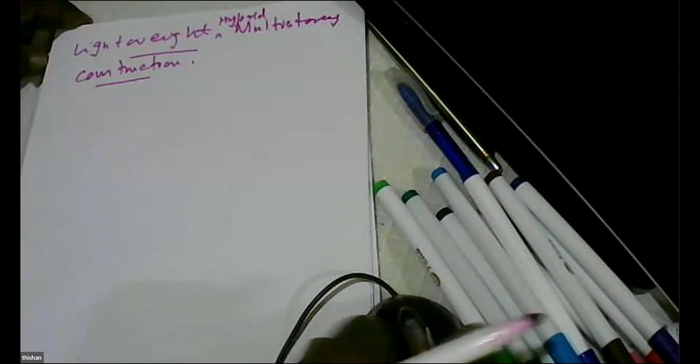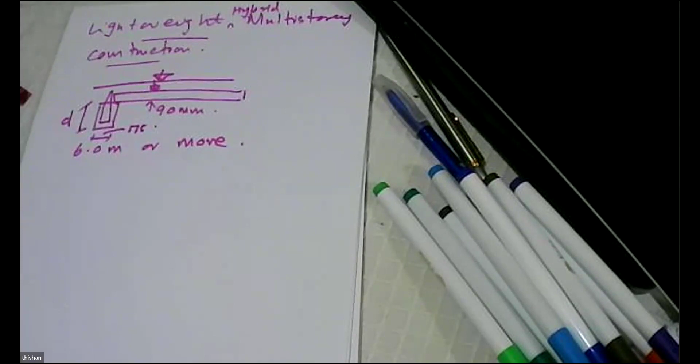Now, when we talk about lightweight hybrid multi-story construction. So last time I showed you that this precast slab system, with a thickness of 90 millimeters altogether with the screed, has the potential to span anything up to 6 meters or more, despite its slab thickness being 90, by using 175 millimeter wide beams, where the depth has to be increased as the span increases. So that's what we learned last time.

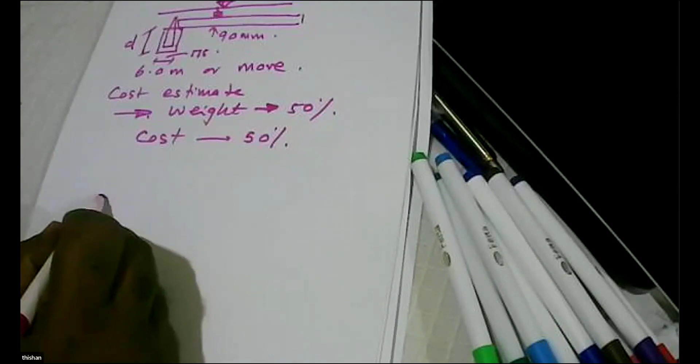Then we did a rough cost estimate. And what I showed was the weight is nearly 50%. Cost is sometimes even less than 50%. So it could be 50% or less. Then, we are having this system where we precast the beams. It can be precast or cast in situ, depending on the lifting capacities available. If you have a tower crane, you can even precast these beams.

Then, because we are doing a 45 millimeter thick screed, where all these beams are propped, there are props during the construction. So the deflection is 0. So when you are removing the props, first we have to remove these. Then gradually we have to remove these from the center outwards. If we are removing the props outer to inwards, and finally we remove the middle prop, then we immediately increase the span by 100%.

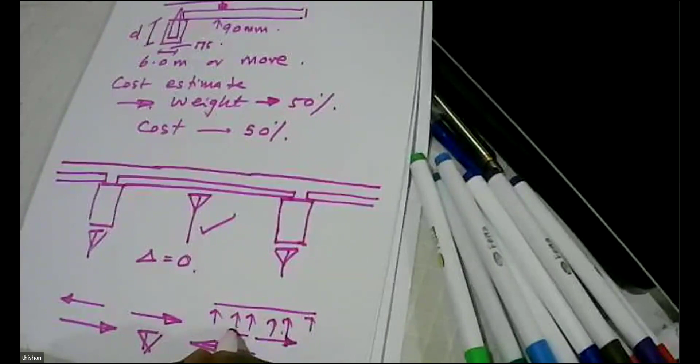So basically we have many props. When we are removing the props, it should be center outwards. But if we start removing the props this way, it's wrong. Why? Because we are going to remove the prop in the middle at once, and that can increase the span by 2 times, adding a shock moment onto the system. So this is the correct way of removing the props. But the center prop can be removed because the slab is not subjected to a heavy load.

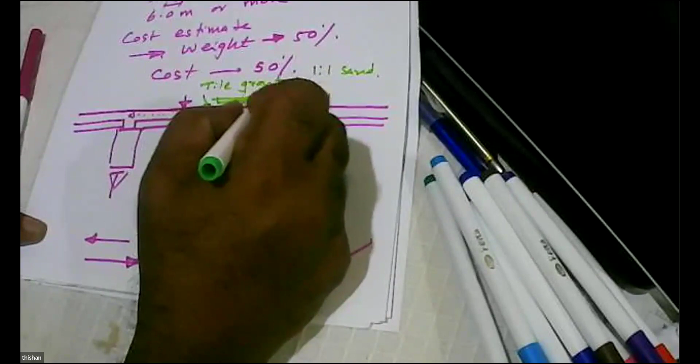Then the other important thing is, because we are having this only as 45 millimeters, the other advantage is that we can do it at a controlled pace so that we can finish it perfectly level. Either the tile bed can directly come on this, and another technique available is tile grout. We add 1:1 sand as well. So rather than using grout directly, we can use a sand and grout mix, and that will allow us to maintain a slightly thicker tile bed, so that any unevenness on this surface can be taken into account by the tile bed. So you don't need a leveling screed, if we are careful.

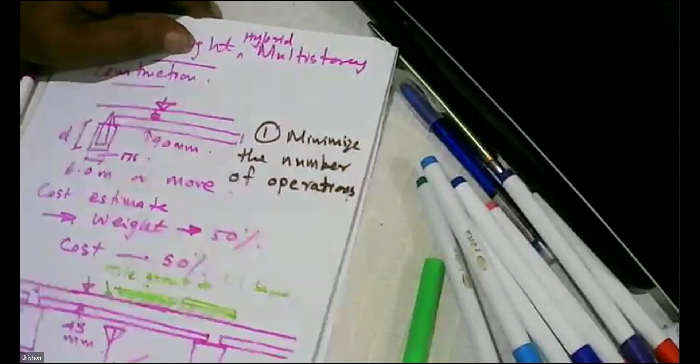So if you look at today's context, we need these because we are supposed to minimize the number of operations. Although we say labor is cheap in Sri Lanka, still, we have to spend 3,500 rupees per day for a laborer, and 4,500 to 5,000 rupees per day for a skilled laborer. So minimizing the number of operations is also an important part of this cost optimization process.

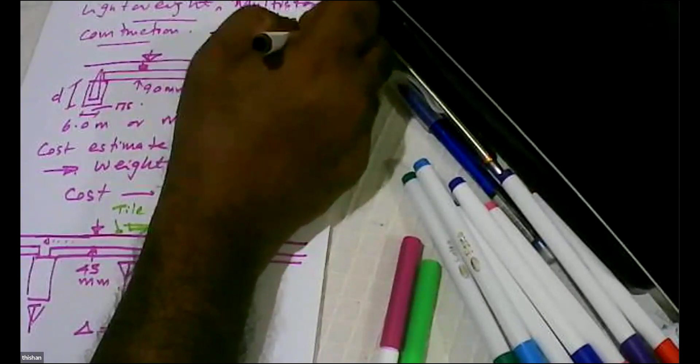So today is the 15th lecture of this series, and today is 20th March 2024, and page number 1. Okay. So basically what you see is this.

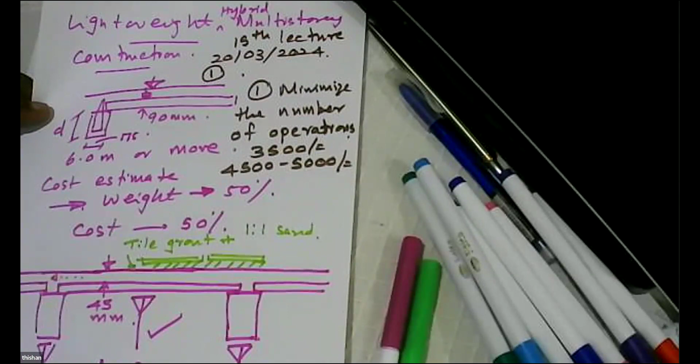Then we have to see what are the possibilities available when we try to apply this technology to apartment buildings and houses, and what are the remaining parts of design that we have to do. So far we have covered most of the concrete related designs, like the design of the slab system, the composite system, and individual beams, in great detail. Now, because it's a hybrid system, the concrete block wall or cement block wall is also playing a role. So we have to look at masonry design and also the column design.

So the number 2. So if I look at a typical scenario, let's say we have a house like this. So we have the rooms, this area, like wet kitchen, pantry, and bedroom, and washroom, whatever. It can be anything that we like.

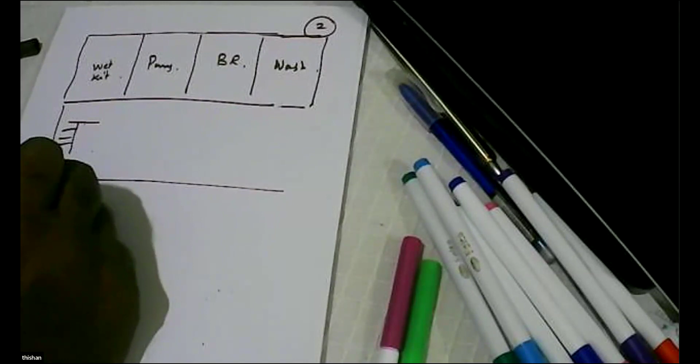And then we might have, so I'm trying to use the same plan that I used earlier to highlight the issues. And then this might be the living area. And you might have a garage and entrance and bedrooms, washrooms, and so on. So what are the issues? So if you look at this type of system, then how can we optimize?

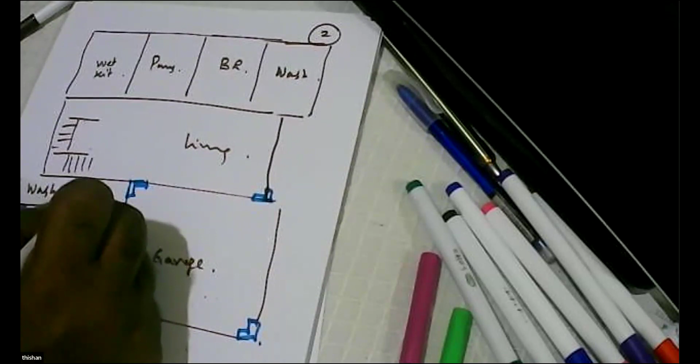So here, these are living areas, so we might have large openings. So we might need some columns like this, and some columns like this, and we might also consider having some columns at these locations. I'm just marking, but some of these may not be essential. So if they are not essential, we can drop them later. So these are possibilities only. And these locations, few columns.

So why do we need columns like that? For example, we need large openings, windows. We might need large doors here. And we might need large windows here. And we might need another large opening connecting the living and garage spaces. And here we might need a big window. So when you consider all these possibilities, what is the best way to arrange the beams and how to optimize?

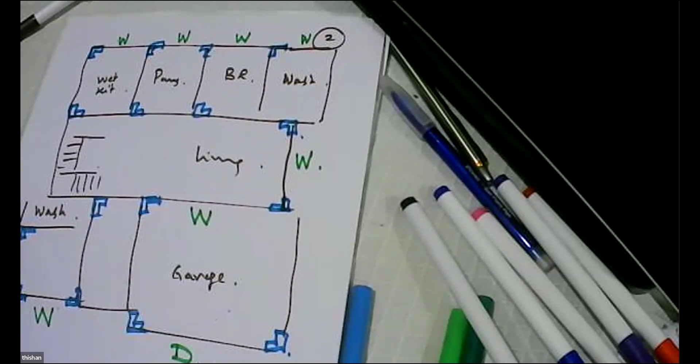So because we are having some columns here, we can certainly run a main beam here. So I'll use purple for the main beams. So we can run a main beam here. And we can also run a main beam in this area. Run a main beam here. Run a main beam. Then we have to see in which direction we run the secondary beams, the beams that will support the slab panels.

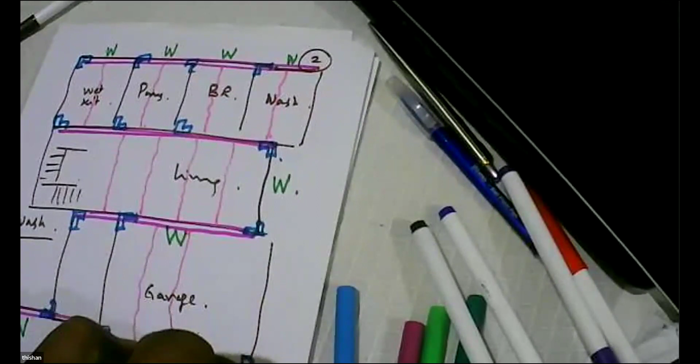So if you look at that aspect, what you see is we can run a set of beams like this. And we can run a set of beams like this. And we can also run some beams like this. If this area is about 2 meters, you can directly support onto the beam. And here also we can run the beam like that. So those are the possibilities, which means we are running the slabs this way. Here also we run the slabs this way.

So if you look at the scenario, here you can see these slabs will span this way. So this is 4 meters, so half of that is 2 meters. So we have a beam. So this wall will carry a load, and the load has a width of 2.0 meters. And this beam will carry a load.

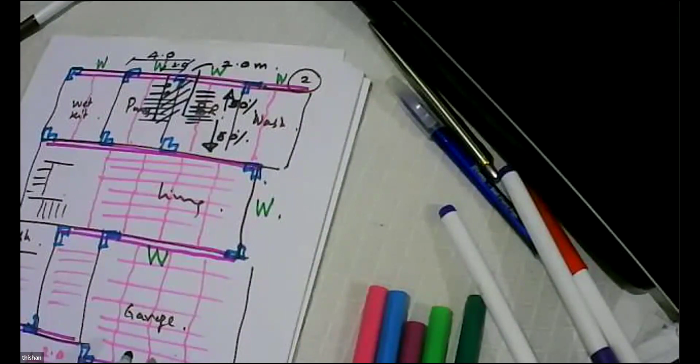50% of this will be transferred this way. 50% will go that way. But that 50% will go on to another concrete beam, and there are concrete columns to take that load. So the concern may be the load that is transferred onto the masonry wall. So we have a masonry wall. The thickness can vary between 150 to 200. Minimum is 150, and generally the maximum width of a block wall is 200. So we have an upper limit of 200.

There's a load. So there's a panel supported on the wall directly. Then on that, we are going to build another wall like that. And then we might have another slab. So if you consider the load from the slabs, the slab thickness is 90 millimeters. So we have 1.35 times (0.09 × 25 + 1.0 for finishes) plus 1.5 times the live load. The minimum load specified in Eurocode is 1.5 for houses, anywhere in the house. But we'll assume something like 2 just to keep a small margin.

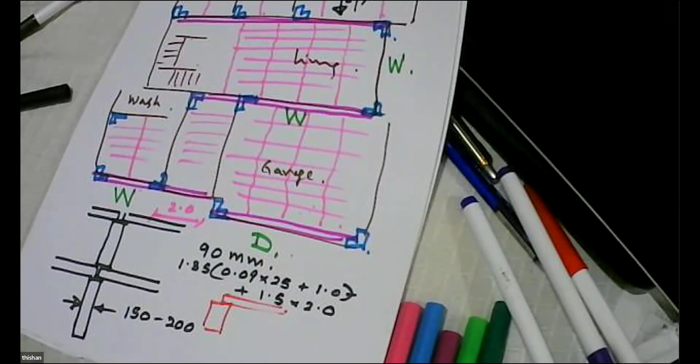So this comes to 0.09 × 25 plus 1, 3.25 × 1.35, plus 3. So 7.38. So let's say approximately equal to 7.5 kilonewtons per meter square. That is the load that will be transferred here. So you can see, at each floor level, we get 15 kilonewtons per meter transferred onto the wall.

So the question is, how many floors can this 150 millimeter thick wall support before it reaches its capacity? That is a question we have to ask. For that, we have to look at masonry design.

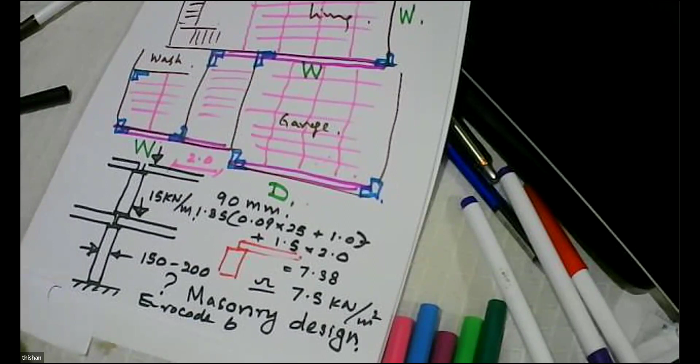So now when you look at the situation, page number 3, we have to see where these columns will come. So we have a wall, and the wall goes like that. When we have a wall like this, we can have two possibilities. The first possibility is we can have a typical 225 by 225 column.

This is 150 millimeters, and we try to have this column. But there are many disadvantages. One is we can see it creates a corner, and plastering this corner is a difficult task. It takes time, it takes labor. It won't take any extra material, but it takes labor. And people find it unacceptable to have columns projecting like that.

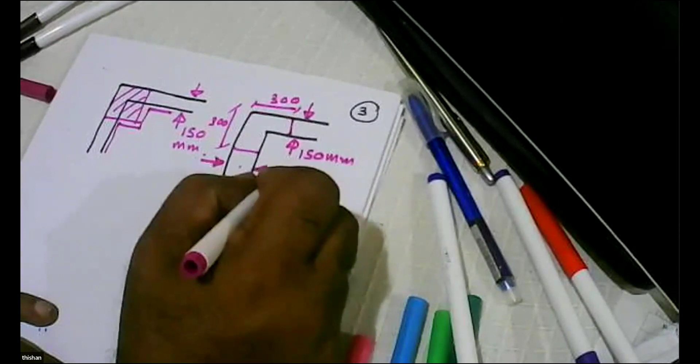So what is the other option available? Other option is have 300 this way, 300 this way, and have a thickness of 150. So it's an L-shaped column.

Now let's do a comparison. So this is 225 by 225, the area is 225 by 225. Here the area is 300 by 150 plus 150 by 150. So let's do the numbers and see which one is bigger.

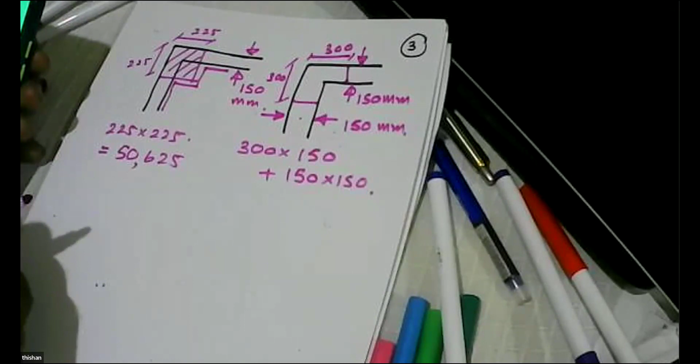If you look at the smaller one... Bandhuka, can you tell the answer here? 225 by 225, so 50,625, is that right? The other one is 300 by 150... other one is 67,500. Okay, so we have two areas.

So you can see this column is even bigger. Although it looks small, it's bigger.

So if you look at the type of loads that come onto this column, the loads will primarily come from this side. It goes like this until it meets another column. So these are the main beam. Every 2 meters it will have a beam running in the other direction. So you can see these 2 meters, these 2 meters. All this load from here to here will be transferred onto this beam.

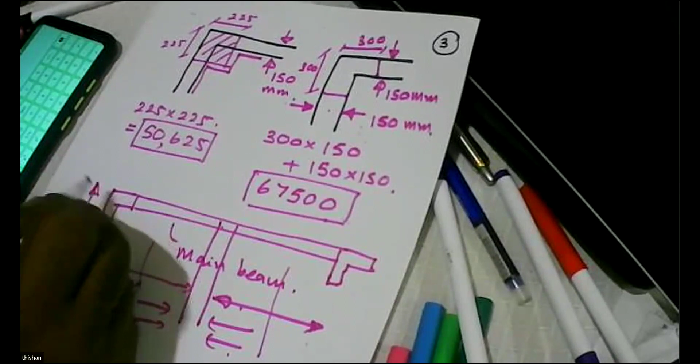And in this direction, if we have 4 meters, say 5 meters, then the load on this beam will be like this. It will have the load.

Let's assume this is a large window, and similar windows are in the upper floors as well, so we can simplify the calculation. So what we get is a load of 7.5 into 2 meters into 5 divided by 2. So we get a load of 7.5 into 2 into 2.5. So we get a load of 37.5.

And it's a continuous beam, so we can analyze it. You can see it's not a major load.

Then we have to see at which level we can have this beam, because if we have a window, we need to have a lintel as well. If you look at the level that we need this beam, you'll see we have the building opening - generally the openings are 2.4 meters tall, and each block has a height of 200. So the main beam can have a height of 2 times the block work, so the beam can have a height of 400. And then at the center we are getting 37 point...

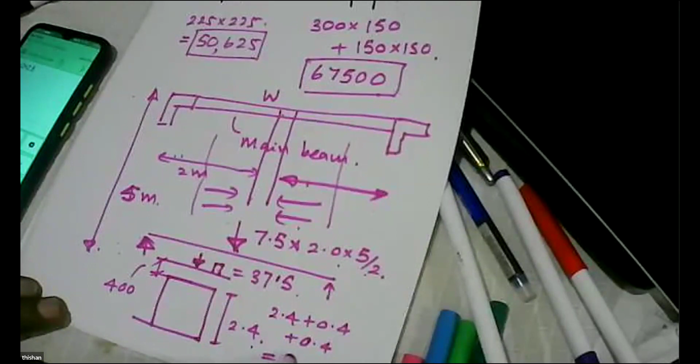And then we have to decide whether we are going to have the beams in this other direction, like this beam, at which level. So that's something we have to work out. If it is 2.4, 2.8, so you find that 2.4 plus 0.4 plus if the height of the beam system is, let's say, another 0.4, you'll find the floor-to-floor height is 3.2 meters, not excessive. The floor-to-floor height is 3.2 meters. So these numbers have to be carefully worked out.

So you have to decide at which level this beam will run, and the ideal is we run it at the lintel level, so that automatically this beam will form the lintel. So you don't have to spend money for lintel or anything - the main beam will be the lintel as well. So there's an advantage there as well.

So if you look at this scenario, we get a load of 37.5. Half the load will go this way, half will go this way. So you can see from each floor what you are transferring, and when you consider the self weight of all these beams, it might be about 20 kilonewtons. So we are not transferring a huge load, it's a small load when the rooms are small.

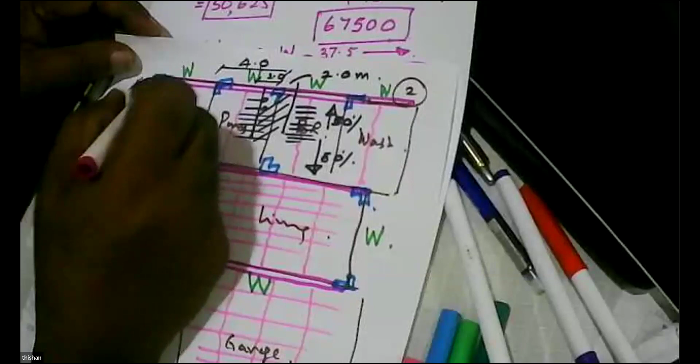I'm looking at this part of the building where this can be about 5 meters and these are around 4 meters. Because we are transferring part of the load into this side by having slabs, and also having windows one on top of the other, the loads on this beam will not be excessive. So this column is very lightly loaded.

So what I want to tell you is, we have a column that is very lightly loaded, but it has an area bigger than this column. Which means this is good news, because we have a column supporting a main beam but it is not excessively loaded. So this says we can have minimum reinforcement on this column. That's good news, because we want to minimize the amount of reinforcement needed in the building.

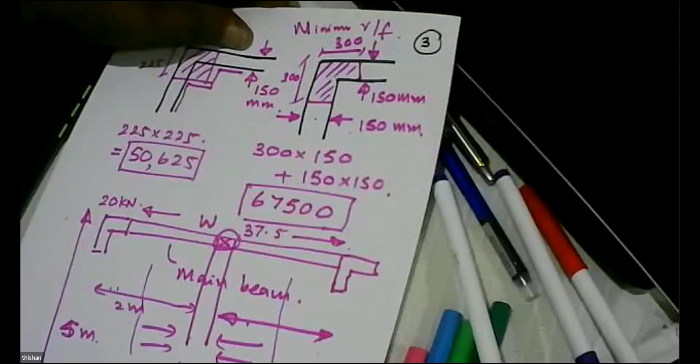So what is the reason for this? The reason is part of this load is actually taken by the wall. That is the reason. So you can see, not only with the slab, even with the frame involved, we are going to get an advantage where we need a minimum amount of reinforcement.

So if you look at this scenario, let's look at the column. I'm showing you the possibilities. When you do the actual calculations we can get the exact numbers. So this has 300, this has 300, this has 150, this has 150.

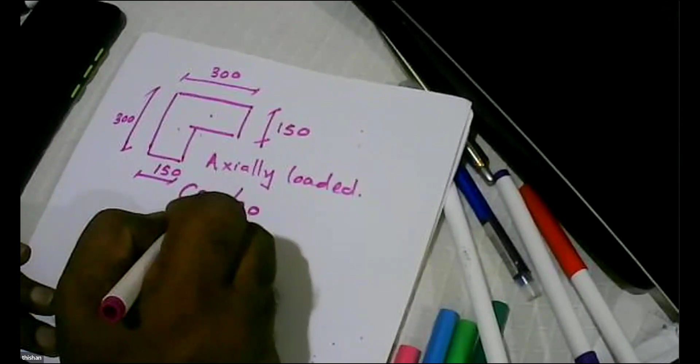Let's assume that this is axially loaded, without reinforcement, and let's assume we have been smart and able to get a concrete of C25/30 by using some admixtures and also with proper curing. So if we get 25 megapascal concrete, what is the load carrying capacity of this section?

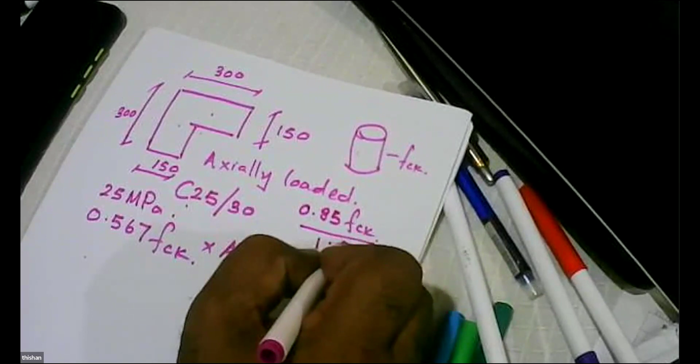Load carrying capacity is 0.567 FCK times area of concrete. How do you get it? Because when you test a cylinder, strength is FCK, so the axial load carrying capacity is 0.85 times FCK, and we have to divide it by the partial factor of safety for material strength 1.5. So 0.85 divided by 1.5 is 0.567. We can substitute 25 here, and the area 67,500 here, and divide, with 10 to the power minus 3.

You will see that this can carry 0.567 into 25 into 67,500, which gives 956 kilonewton capacity. So you can see this column, although it looks small, it is not small. It is bigger than the typical or most familiar size of columns. It is bigger than a 225 by 225 column, and it can carry about 956 kilonewtons.

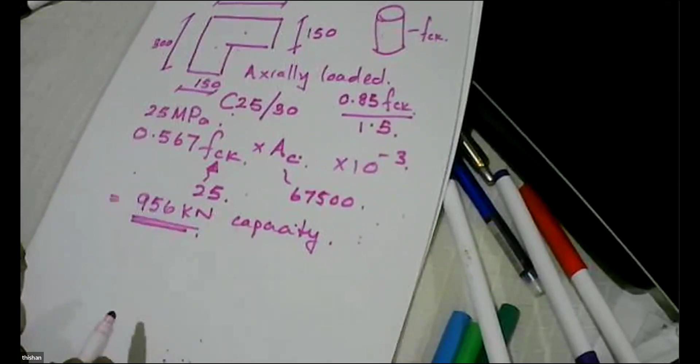And its buckling tendency is very low. Why? It's L-shaped, and each direction has a length of 300 millimeters. So the tendency for buckling is very low in this one, because it has a 300 millimeter length in one direction. Although this part is empty, the buckling tendency is very low.

So we can provide 0.2% reinforcement as practiced in the Eurocode. 67,500 into 0.002 is equal to 135 square millimeters. But Eurocode says when you are providing reinforcement, the minimum size for the vertical bar is 12 millimeters.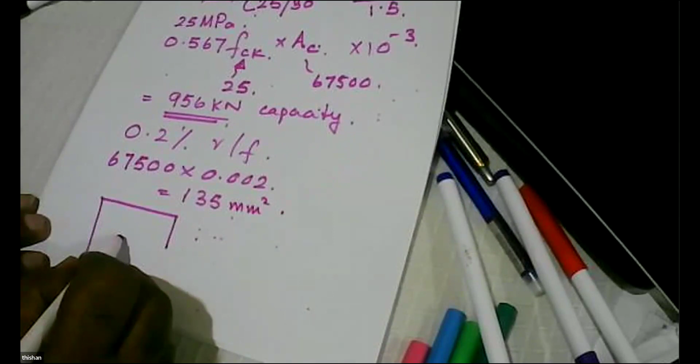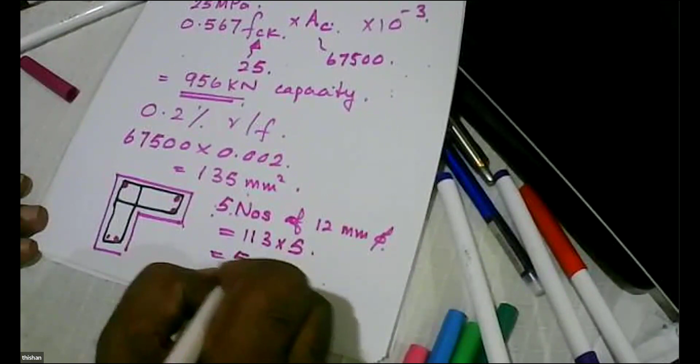So you need a 12 millimeter bar, we need one bar. The moment you have bars like that, we can have a link, and we can have another link, that also can be provided 2 bars. So the minimum number of bars we need in this column is 5 numbers of 12 millimeter, giving 113 into 5, so something like 550 millimeter square, which is much more than what is given there.

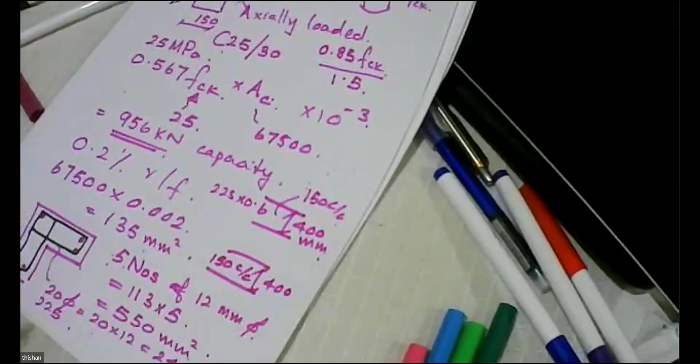Then we can have links at 20 times diameter. 20 into 12 is 240, so we can have links at 225. Eurocode recommends at the top and bottom, 400 millimeters, reduce this spacing up to 0.6. So 225 multiplied by 0.6 gives something like 150, so here we can have 150 center to center, bottom 400 millimeters, 150 center to center. We need some links, and unfortunately we don't have any bar size less than 8 millimeters, so this link has to be 8 millimeter.

Because Eurocode does not allow mild steel, it says any reinforcement should be 400 to 600 type. It doesn't say that about the link specifically, so the link also should be the same strength. Because of that, the smallest size of reinforcement available in the market is 8 millimeter, so we have to use 8 millimeter links.

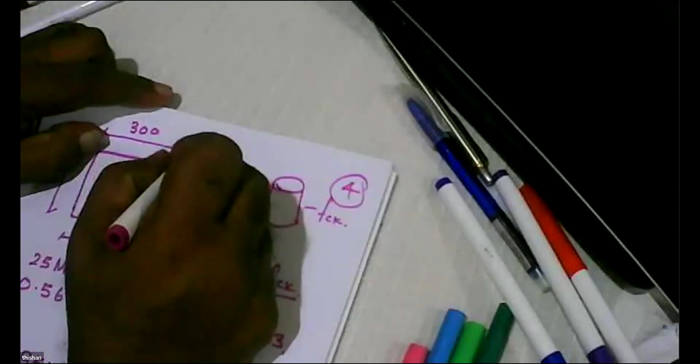This shows the possibility that we have a column which actually goes into the wall. But you might ask, why don't we go for a 300 by 150 column? We all know 150 is not a very safe dimension, because this might have a tendency for buckling. So why we go for L shape is to prevent that tendency for buckling.

So the moment you prevent the tendency for buckling, how does the column fail? The column fails by crushing of concrete. The moment we prevent the tendency for buckling, the column fails by crushing of concrete. So we ensure that the column fails by crushing of concrete, not by buckling of the column.

That's why we go for this L shape. Otherwise, this L shape is not needed unless for the buckling tendency of thin columns. We deliberately make the column thin because of practical advantages, like not showing the presence of the column at the corner. So we are actually going for L shape, right?

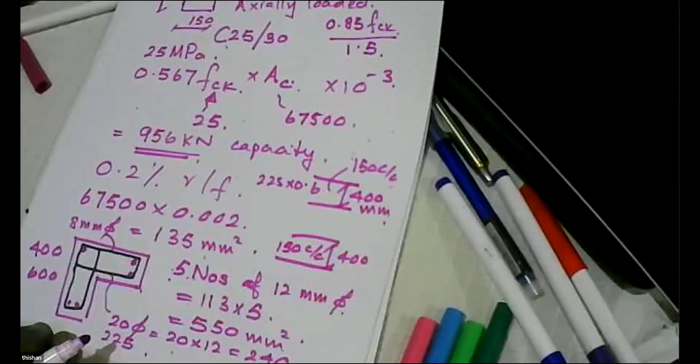Which is actually larger than the normal column, we need a little extra concrete. But if you look at the system, the main advantage is we run the main beams only in one direction. We run the main beams only in one direction. All the other beams are the beams of the slab system.

Or else we might have a beam at the lintel level like this, or else we are making use of the wall to carry the vertical loads, or else we are making use of the wall to carry the vertical loads.

Because of all these reasons, you can see we can get a significant cost advantage because we are using the minimum size reinforcement, and even if you go for 5-6 stories, still we can go with the minimum size of reinforcement. That is a huge advantage when you consider the cost of construction.

And the other important aspect is, these columns are not obstructing the arrangement of interior, because columns can be made part of the wall system. Columns can be made part of the wall system.

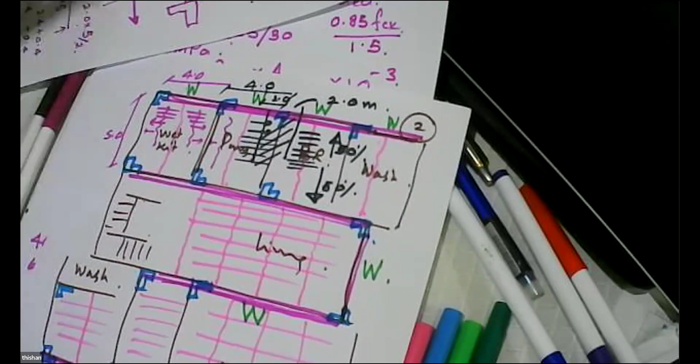Is that clear, Bandukar? Yes, that is clear, sir. Right, so now you can see there's no major issue with the columns. And the beam, the main beam, is also not a major issue.

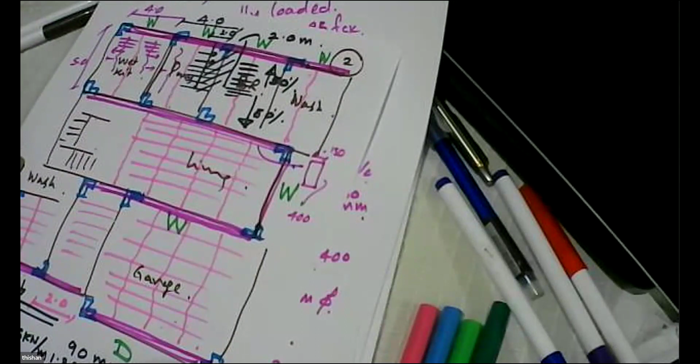But it's most likely that because we are going to have this main beam at the lintel level, we will have to design the main beam as a rectangular beam, 400 deep, 150 width. So we have to design it as a 400 deep, 150 wide beam. There's no buckling tendency in any of these members because they are all part of the masonry and concrete system.

So then you might ask, okay, we can see the possibilities for apartments, but I would like to take one step further, explaining the possibilities for apartments. In an apartment building, we can have large spans like this, where two of them might form, or one of them might form the apartment, depending on the size. This can be about 7 meters.

This can be about 8 meters. 7 into 8, maybe 8 multiplied by 7, 56. So this area is about 56 square meters. So in an apartment building, what we can do is go for large spans like this with the columns at the corners.

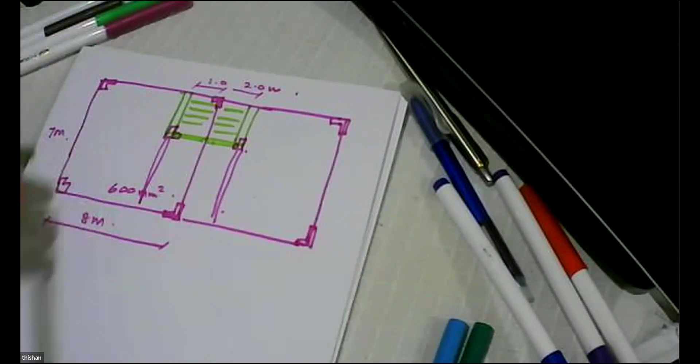So why we prefer masonry for a washroom is, on the masonry wall we can support the panels, and we can easily have a drop, because the washrooms need a drop of 200, and we can have a drop up to 200 millimeters. Why? Because the height of the block is 200 millimeters.

So we can have the panel with a drop of 200 millimeters and fill this up. So this can be 200 and our panel can also give 90, so this can be 110. So we make up 200 millimeters and then we can run other main beams.

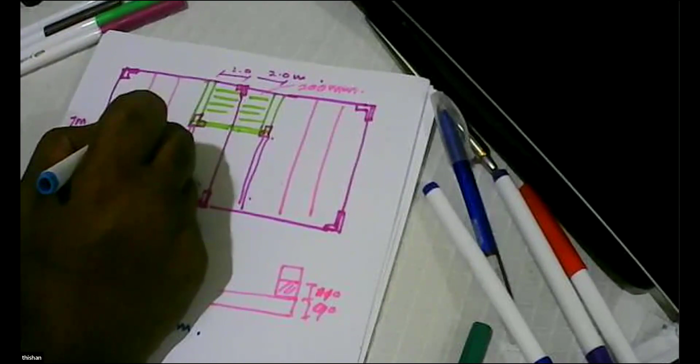The advantage of this is that now if you are going to have any partition wall, it is not a major problem. Why? Now if we want a partition wall, what we have to do is below the partition wall have a lintel or a beam of 200 millimeter depth, and the partition walls can be 100 millimeter. So what happens? This beam will transfer the weight of the partition wall onto this beam and onto this beam.

And when you are designing the beam, because we have to design the beam for all these loads, you will find the beam is subjected to a UDL plus a point load. So it's a matter of designing this beam to carry it.

So you can see there's a huge possibility that is not available with solid slabs, because solid slabs are not capable of supporting this kind of partition walls without having a huge amount of extra reinforcement. Whereas in this system, because we are having beams, we can easily support any kind of partition wall either across the beam or along the beam.

So we can have a partition wall here, no problem, because this beam can be designed to carry the weight of the partition wall. So Bandhuka, can you see the advantage of this system for apartment buildings, right? Yes, sir. So if you carefully plan the apartment building, this needs a lot of planning. Yes, sir. But you can certainly make sure that the system is very efficient, and you don't have to go for a lot of walls at various locations.

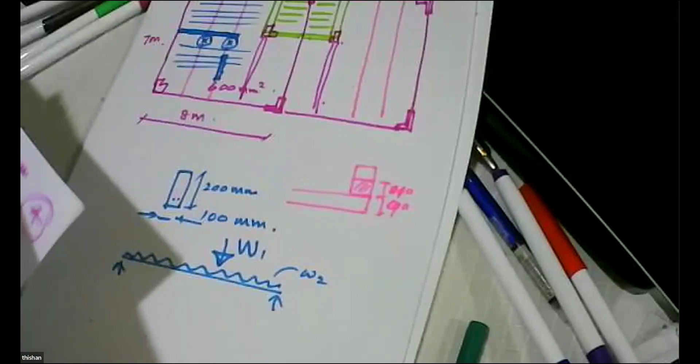Yes, that's clear. So basically, certainly we have to work with the architect, because the architect decides, so we have to make the architect understand. What you have to keep in mind is, at the moment we have a huge crisis in the construction industry, because nobody wants to invest. So if you want to bring the investment in, we have to think differently, right? We can't think in the traditional way and make things happen, because in the traditional way costs are too high. We have to bring the cost down, but with innovative thinking. So that's the way forward.

So what you see is we need some kind of adjustment, and there are many opportunities available for planning apartment buildings. So we have a few undergraduates and postgraduates working on all these aspects of how to plan apartments, what are the rules the architect should know, what we have to tell the architect, how to think of the structural requirements, and what are the advantages of this system.

And also we have to think about how to make use of very lightweight materials like autoclaved aerated blocks, or lightweight partitioning materials, where the cost advantage will come because they are lightweight. We can make a saving on the reinforcement. So likewise, we have to think differently, right?

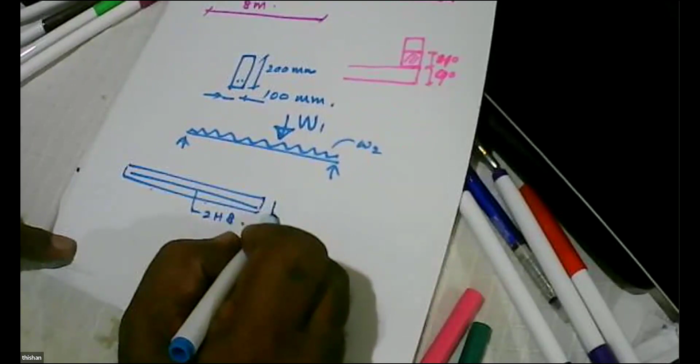But when I presented the slabs, what I said was, when we have 2H8 bars with the beam supporting it, and make it continuous by having continuity reinforcement.

This 2H8 at 150 can give a huge capacity. So sometimes you will find these additional beams are not essential. If you have done the construction properly, even the slab system can take it, because when you support

a wall on a panel, the weight of the wall is W. Only 40% of W will be carried by this panel. The remaining 30% and 30% will be carried by the adjacent panels. So when you apply a load on a width of 300 millimeters, the actual load will be carried by a width of 900 millimeters.

And also we have 90 millimeters spanning only 2 meters, it gives a huge potential. So if you have any lightweight material, you'll find this lightweight material can be directly supported on the slab without having any concrete elements. So this opens up a new era where we have to think more and more about lightweight materials, lightweight panels or lightweight blocks. So that's where the future lies.

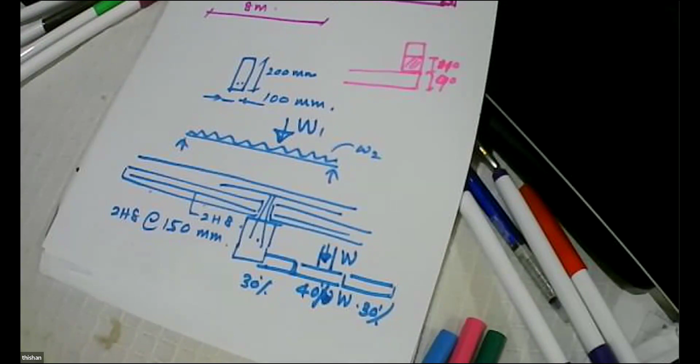Because when we go for large spans, this system itself is lightweight, right? And the other advantage of this is, this need not be 150 blocks. If you are going for large apartment buildings, we can actually go for 200 millimeter blocks, which will allow this column to be automatically bigger, like 400 by 200, giving even a bigger possibility, provided the architects are willing to take up the challenge of going for open architecture, where the lighting and all those requirements can be satisfied, and also the washrooms can be located one on top of the other.

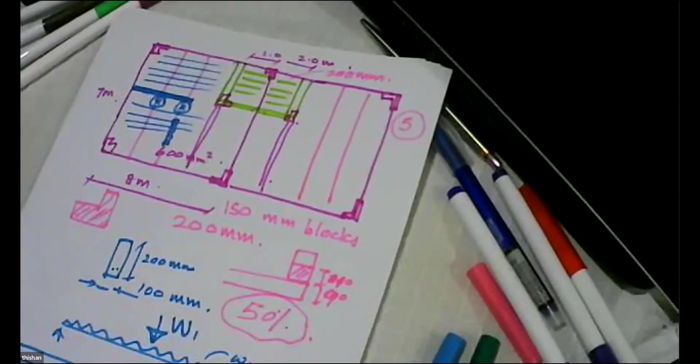So the moment you satisfy those conditions, we have been looking at these possibilities. What he thought was, okay, there's a great possibility to plan the buildings using this system. So that's what we actually found. So what I say is, we'd like many of you thinking about these possibilities, because this may be the future. The reason is we can reach a cost saving of around 50%. Is that clear, Bandhuka? Yes, that's clear, sir.

Right. So basically, why I present this is, we'd like many of you thinking positively about the advantages that this can offer, and also explaining these structural systems to architects, so that they will also start thinking in the same lines, and they will come up with feasible solutions that will finally give us huge cost advantages, and the general public will find investing in buildings is a possibility again.

At the moment, they consider it's not a possibility. But the moment they find the costs are lower, they will find investing in the industry is a possibility. So what I feel is this lightweight hybrid multi-story construction has a huge potential to revive the industry. Right? Is that clear, Bandhuka? Yes, sir. That's correct, sir.

Yeah. Then we also have to think about the commercial buildings, where the situation is different, where we will have large buildings, large spans, and things like that. This is the large span. So in this area, core, and these areas thin slabs, main beams.

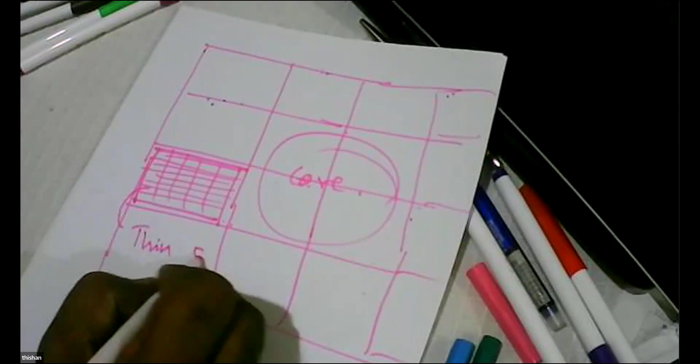So all these can be easily converted to these thin slabs. So these are the thin slabs. Although the spans are large, the thin slabs can easily span any length, because one, they are lightweight. Secondly, they are supported by beams. So there are two possibilities.

So basically, you can see the applications can be there for even tall and super tall buildings, especially in commercial buildings. There's a huge possibility. And what you find is, this is not something new. If you look at textbooks, you can find things like rib slabs.

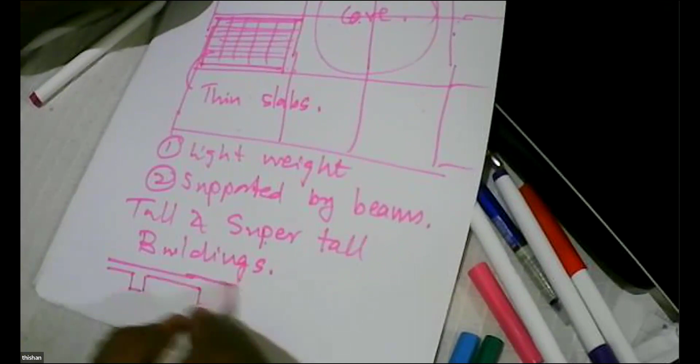But what is new is, these rib slabs did not have shear reinforcement, usually. Whereas the beam system we are designing has shear reinforcement. So this has a huge strength, because we are not relying on the strength of concrete to carry shear. Whereas in most of these rib slab systems, we rely a lot on the ability of concrete to carry shear.

Whereas in this system, we are not relying on the ability of concrete to carry shear. We are providing shear links in a lightweight system. So that's why it can span over long spans, like 6 meters, 8 meters, all are possibilities. Because 8 meter is a big span.

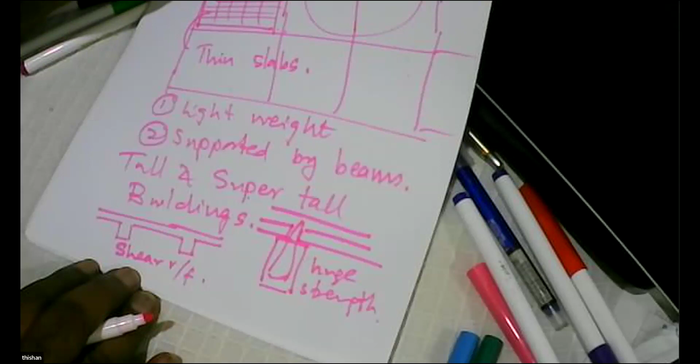But because we have a lightweight system, the slab thickness is only 90 millimeters, and each beam supports a load of only a 2 meter wide strip. You'll find all these strips are only 2 meters wide.

So columns carry, beams carry only that load. So you find the system works very well because it has no restriction on the spans. So that's how it can become a viable solution even for tall buildings.

And the other advantage of tall buildings is all these can be precast. These precast beams can be even pre-stressed concrete, because we really have no need for it to be reinforced concrete. So these long beams can be pre-stressed concrete. The advantage is all the tall buildings will have a tower crane. So the moment there's a tower crane, lifting the beams, placing them, all can be done with the tower crane.

So there's a huge cost saving, because lifting these is a very tedious affair when you try to do things manually. Whereas if you have a tall building, most of the building can be precast elsewhere and fitted at the site with necessary continuity reinforcement to make the super tall building super light while having the robustness. So that's the future possibilities.

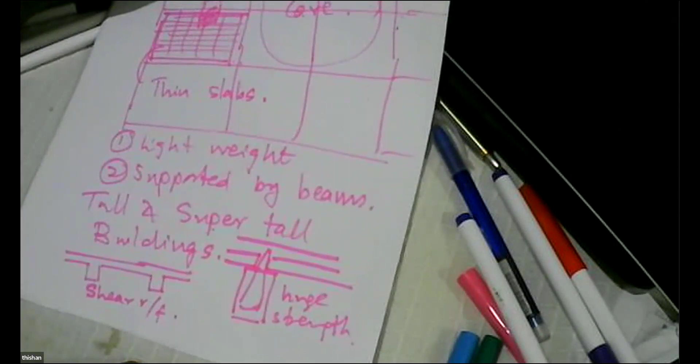Okay. So these are all possibilities. So there's a huge potential for us to do more and more studies, case studies, practical applications. But we have to be a little bold and do it, because otherwise it will be another good solution that was limited to research and development. So we'd like it to be taken to a new stage.

So in tall buildings, you will not have many restrictions. The masonry will not be carrying the load. It will be concrete, but this allows us to bring in pre-stressed concrete, PT, into the building by precasting the beams. And not only the beams, even the slabs can be precast with pre-stressed concrete. So all these are possibilities, and especially in large buildings, there's a possibility to precast most of the building, except the main columns and beams, elsewhere and fit it at the site.

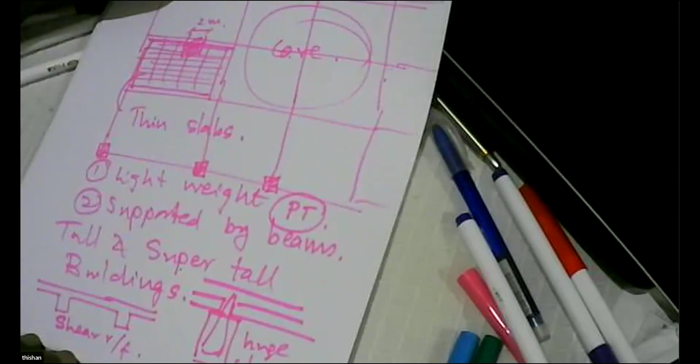Because you all know, a concrete slab is a major task even in commercial buildings, because it needs a lot of attention, a lot of work at the site, and that can all be reduced if we develop these systems more, because this has huge potential, especially because of this shear link. Because most of the restriction on the other systems had been that they have tried their best not to have shear links because they are cumbersome. But in this particular system, because we are going for precast slabs of 2 meters, we have only a few beams, and those can be precast or in situ cast, depending on the requirement.

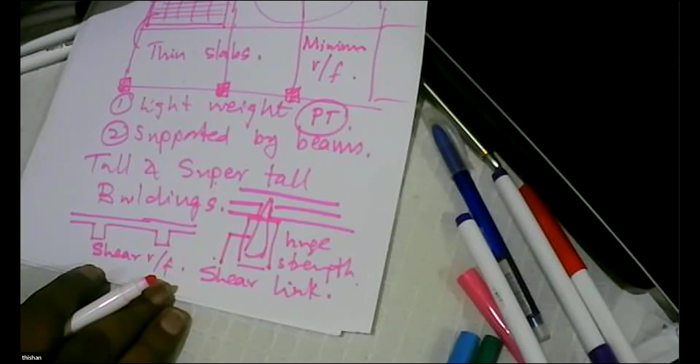And the main aim is to minimize reinforcement. And the other aim is to remove any concrete that is not doing anything useful. Remove as much concrete as possible if it is not doing anything useful. So that's where PT also comes in, because in the PT section, the whole section is effective. So pre-stressed concrete also has a huge potential in this system, where the PT beams have to be cast with links. That is not a major problem. You can do the precasting operation with shear links. That's not a major hurdle. So that can be done.

Okay, Bandhuka? Okay, sir. Right. Now let's look at masonry design. So I will use a note. I'll share the screen now. Okay, sir. So I'm sharing. Okay, we can see, sir.

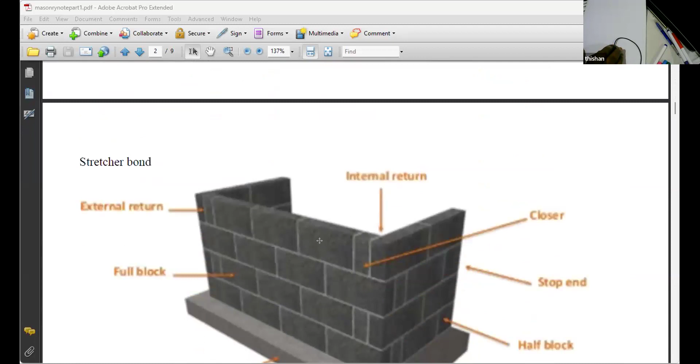This is our undergraduate note where we teach masonry walls. So you are all familiar with masonry, so I don't have to explain a lot about masonry. But I'm going to talk about the strength of masonry, because the first thing is to know the strength of masonry. There are so many different types of masonry available like this. You can do masonry with insulation, all kinds of possibilities are there. And you can see for masonry also, we use the same partial factors of safety, 1.35 GK plus 1.5 QK.

And then in Eurocode, we all know there are ψ0, ψ1 and ψ2 factors. For wind loads, ψ0 is 0.5. And for live loads, ψ0 is 0.7. Those are the exact values that we use in reinforced concrete design. So when you have dead load, live load, and wind load, we have a load case 1.35 GK plus 1.5 QK plus 0.5 times 1.5 WK. So it gives 1.35 GK plus 1.5 QK plus 0.75 WK.

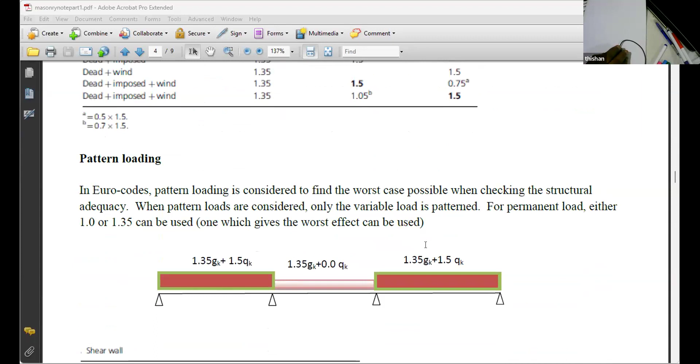And then when you look at pattern loading, pattern loading is the same way as in concrete. And then when you are looking at the different combinations of lateral loading, you can see 1.35, 1.5, 0.75, 1.35, 1.05, 1.5. Likewise, the same scenario as in concrete. And then we'll skip that because that is not relevant to us now.

Right. Then we can have masonry units. And there are so many different types of masonry units. And so there are hollow units. So here we are promoting hollow units made out of concrete aggregate, having the opening area between 25 to 50%. So that's the type of blocks that we manufacture in Sri Lanka.

Because they are hollow blocks, but they have a certain wall thickness. So when you look at the total gross area of the volume, you'll find it's between 25 to 50%. But you can actually measure it and see which category it is, but generally it is in this category. So what you have to keep in mind is we are looking at a group of masonry which is 2A.

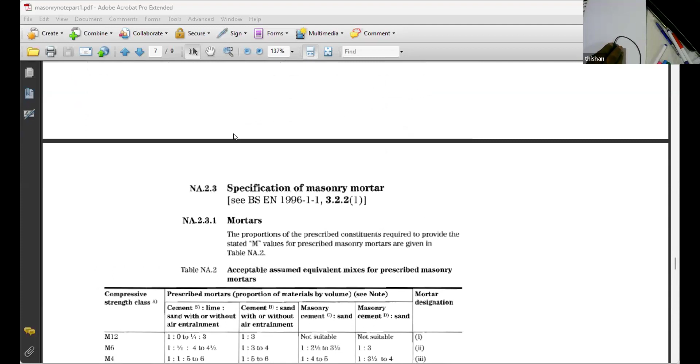Then it says, okay, we have to use certain mortar. And generally we use M2 mortar or M4 mortar or M6 mortar or M12 mortar. But in Sri Lanka, generally we use M4 mortar, which is 1:5 or 1:6 cement sand mortar without air entrainment. So when you use 1:5 mortar, generally we can get a strength of 4 megapascal. So that's why we call it M4 mortar. The expected strength is 4 megapascal.

4 megapascal, right? So basically in M4, the number following the M is the compressive strength for the class at 28 days in newtons per millimeter squared. So when you say M4 mortar, we are looking at a mortar which gives a strength of 4 newtons per millimeter squared or 4 megapascal. And to get that, we have to use 1:5 cement sand mix.

But the important thing is the cement sand mix should not be mixed in the morning and used in the afternoon. So generally within 2 hours of mixing, the mortar should be used. So we should not mix too much mortar. We should mix the mortar in small quantities, sufficient so that we can use the mortar once mixed. We should not keep the mortar without being used too long.

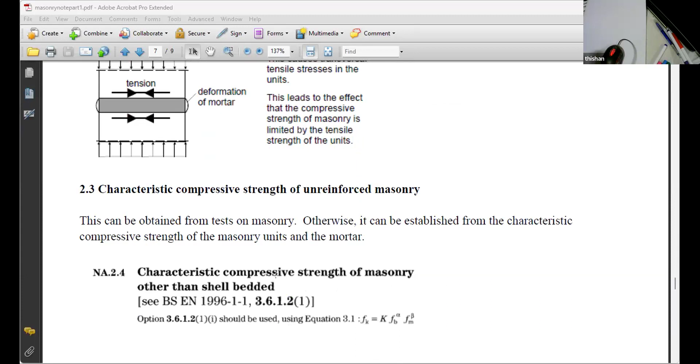And then now the most important thing is not the compressive strength of the masonry unit, but the compressive strength of the wall. So if you look at the compressive strength of the wall, the characteristic strength Fk is given by K times Fb to the alpha, Fm to the beta. So Fb means the compressive strength of the block. Fm means the compressive strength of the mortar.

So you can see this Eurocode has been very good because when we test the individual block, when we know the type of mortar that we are using, straight away we can find the characteristic strength of masonry, right? So otherwise, even in the British code earlier, we did not have that kind of data, that kind of tables. But in the Eurocode, it's very good. So straight away, we know the type of block, we know the type of mortar, and there's a K factor. So it's a matter of finding the K factor.

Is that clear, Bandhuka? Yes, that is clear, sir.

Yeah, that's a huge advantage because the masonry code is not looked at by many, but this is a very good code because it helps us to do the masonry design with a limited amount of testing on the type of unit that we are using. Then the most important parameter is K.

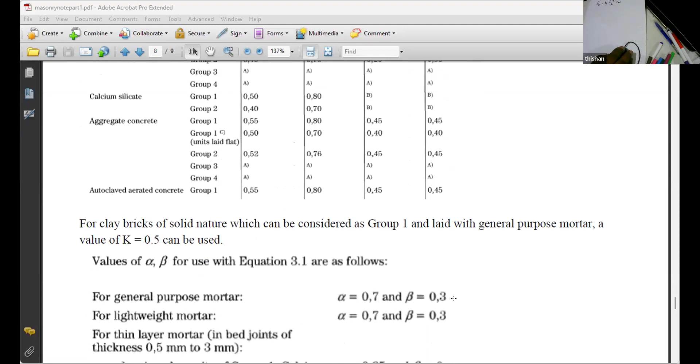Then you will find when you use general purpose mortar of 10 to 12 millimeter, for general purpose mortar, alpha is 0.7, beta is 0.3. So it's a very useful value, right? So if I look at an example, alpha is 0.7, beta is 0.3. Right? So that's what you get. And K is 0.52. And fm is, because we use M4 mortar, 4 newtons per millimeter square. Very easy.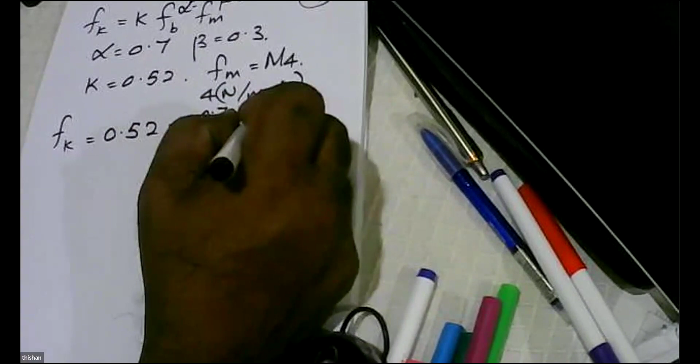Right? And so what happens? fk is 0.52, and let's say we are using 5 megapascal units, to the power 0.7, multiplied by 4 to the power 0.3. So what is the strength? Characteristic strength of masonry is 0.52 multiplied by 5 to the power 0.7, which is 3.08. 4 to the power 0.3, 1.51, into 0.52.

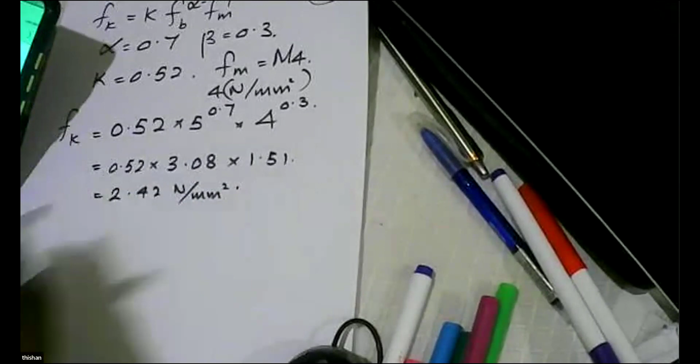So this comes to 0.52 multiplied by 3.08 multiplied by 1.51, 2.42 newtons per millimeter square. So if you buy good high quality cheap concrete based hollow blocks of 5 megapascal strength, at whatever the age you are using it, then the characteristic strength is 2.4.

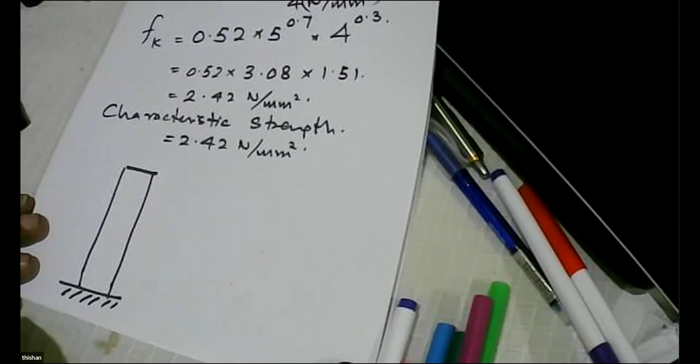But masonry, when you try to use it as a material, we have to look at it in this context. And that is, it can buckle, right? Because it's a slender wall, 150 or 200. Not a thick wall, it's a slender wall. So it has a tendency for buckling. So we have to allow for that. Then we might not load it axially. We might have an eccentricity when you apply the loads. So you have to take that into account. So we'll have a capacity reduction factor.

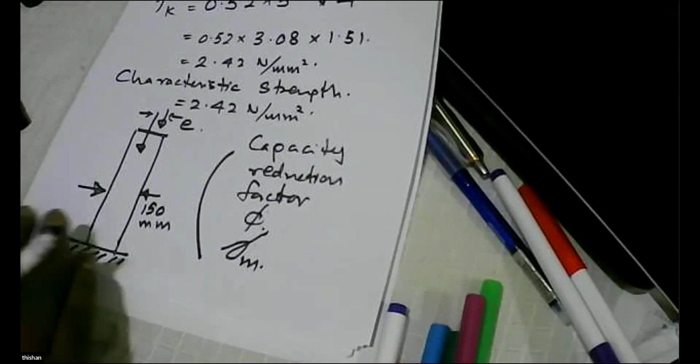We'll have a capacity reduction factor. Yeah, look at the capacity reduction. And when you are using characteristic strength, we have to have a factor of safety, gamma m, on the material strength. Right? So I'll share the screen.

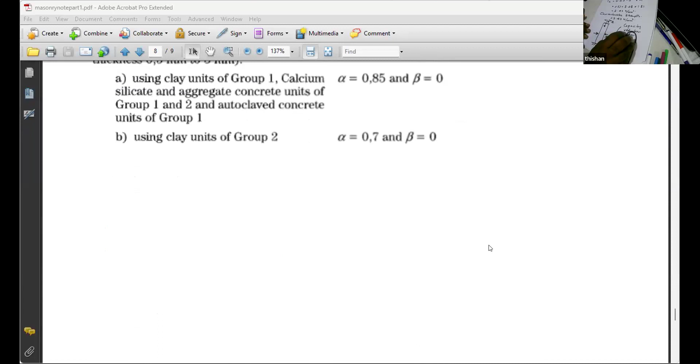So, and then let's assume that the capacity reduction factor phi is 0.7. Then what is the final stress we can have? The final stress is characteristic strength divided by gamma m 3 multiplied by the capacity reduction factor 0.7. So you will find the stress that we can have on masonry is now limited to 2.42 multiplied by 0.7 divided by 3, and it's limited to 0.564 newtons per millimeter square.

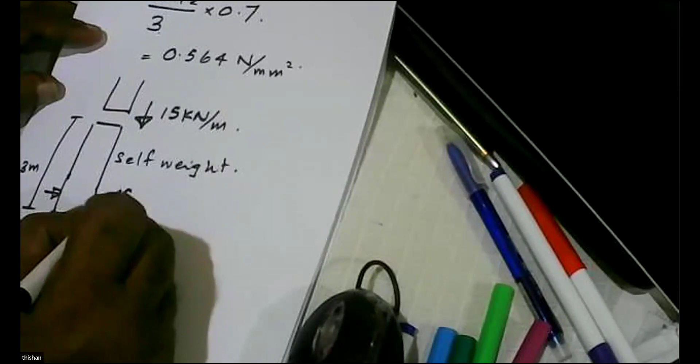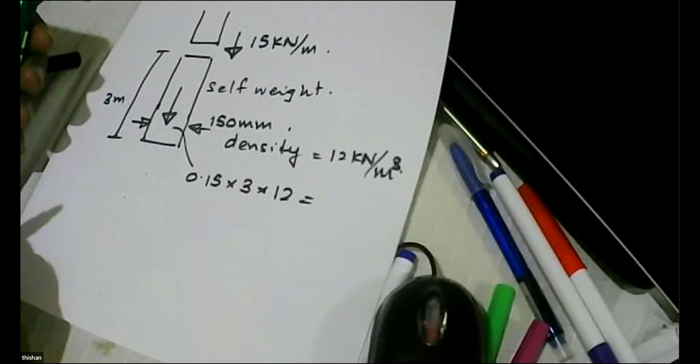Now, can you remember earlier I said at each floor level we get 15 kilonewtons per meter because it supports a panel. And the remaining part of the masonry is self-weight. And if you consider a height of 3 meters and a width of 150 millimeters, a density of 12 kilonewtons per meter cubed because it's a hollow material. Now you can see why I prefer hollow materials, because it has a lower density. So each wall will give a load of 0.15 into 3 into 12. So it gives 5.4 kilonewtons per meter. Is that right, Babu?

Yes, sir. 5.4. Right. So each floor we can say 15 plus 5.4, approximately equal 21 kilonewtons per meter. So if you convert it, you divide it by the width, 21 divided by 0.15, 140 kilonewtons per meter square, or 0.14 newtons per millimeter square. So 0.56 divided by 0.14. What is the answer? 4.

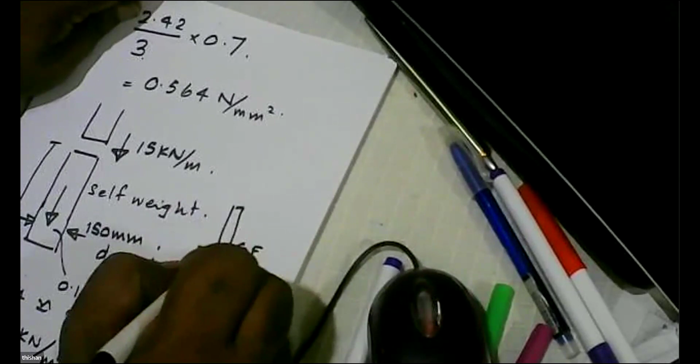So that means we can have 4 floors where masonry supports part of the slab load. So we have the ground floor, we have a slab, we have another floor, we have a slab, we have another floor, we have a slab, we have another floor, we'll have a slab. That's possible. So you can see, even with 150 blocks of 5 newtons per millimeter squared strength, it's possible to go up to 4 floors.

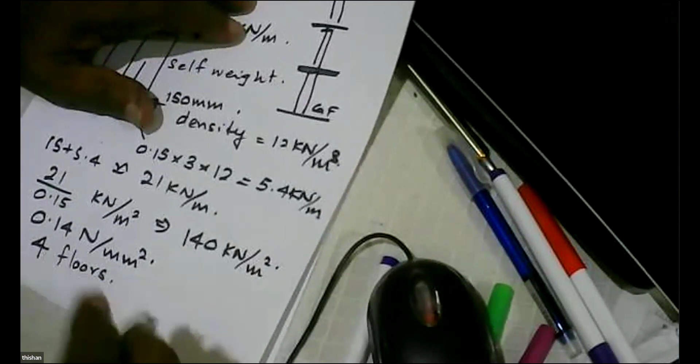If you have a reputed manufacturer, what they say is, you specify the strength, we supply. Why? Because this is a concrete based material, so if you ask for strength 5, what they have to do is cure it, keep it moist, cover it with polythene, and continue curing. What they have to increase is the cement content.

Sand, aggregate, everything will remain the same. So the cost of the block will rise slightly, but you can increase from 5 to 7 or 5 to 8. This shows a huge potential in this system, where you can have either 150 millimeter blocks or even 200 millimeter thick blocks. When you combine the lightweight slab system with the lightweight blocks, the opportunities are huge.

Is that clear? Yes sir, that is clear. So next day we can discuss more about masonry design, how to think about the openings, the stress concentrations, and also how to calculate the capacity reduction factor accurately. So all those things we'll have a look, so you can handle this combined design. It's not only RC design, this involves RC design and masonry design, so it's a combined effort that we need.

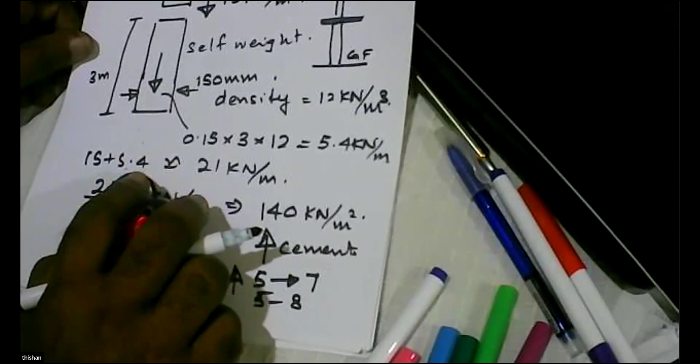Is it possible to use L shape for the column footing, with the column footing also to be L shaped? That is not a major problem or challenge, but we don't have a specific reason to do that, because why we use L shape is we want to embed the column into the wall, but at the foundation level we don't have any restriction as such. So you would be better off using a rectangular footing.

The other question is, in solid slab, shall we consider it as strip slab and design additional rebars for this partition wall loading? Yes, you can do that, because if you look at the Hillerborg strip method, that covers that aspect, but that is not the exact problem.

Problem is you need a lot of reinforcement. Whereas in this case, we increase the reinforcement in the beam, which is a much better element structurally than a slab to carry heavy loads. A slab is actually an ideal element to carry light loads, a beam is an ideal element to carry heavy loads. So in the normal solid slab system, when we try to carry concentrated loads, we are using a slab which is not meant for heavy loads to carry heavy loads.

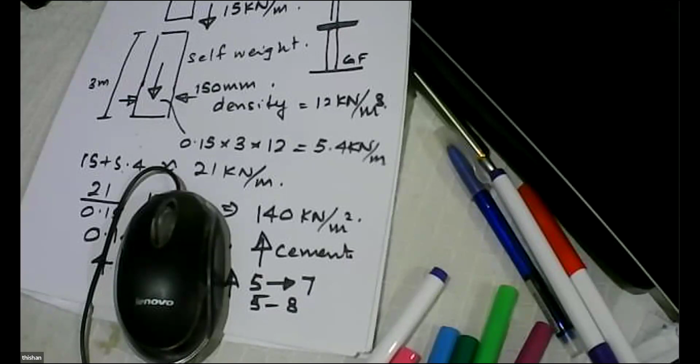And the advantage here is that the masonry walls are loaded. Loaded masonry walls are extremely good at carrying lateral loads. If you have a masonry wall which is not loaded, it can slip and fail. Whereas when the masonry is loaded vertically, it is extremely good at carrying lateral loads. So we have a particular advantage in this system because we are loading the masonry wall, making the structure super robust, very robust. Is that clear, Bandhuka? Yes, that's very clear, sir.